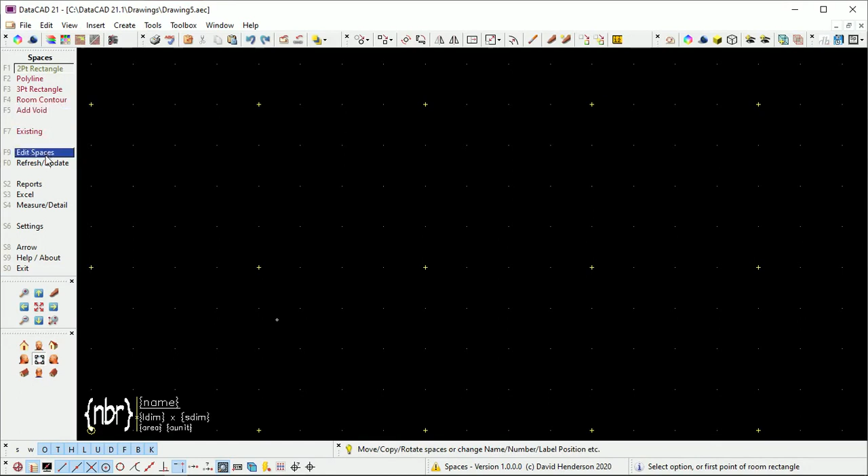Like Space Planner, the Spaces macro allows you to define spaces, to create and maintain labels for those spaces, and to report on spaces. We'll start this video by looking at some of the settings.

The label settings allow you to specify labels as up to 5 lines of text. The data in each line is represented by tags, which are the text in curly braces here. You can type the tags in manually, or you can use the buttons on the left side to insert them.

Alternatively, the label can be defined using a symbol. I've already created a symbol which is shown at the bottom left of the screen here. So I can click the from symbol radio button and choose that symbol which I'm going to use.

The report layout is specified using the same tags to define the data in each type of line. Up to 10 report columns can be specified, and different text format attributes can be assigned to each type of line. I'm just going to make some fairly arbitrary changes to the text formats.

The report can be created on the currently active layer, or you can specify a layer. Additionally, you can choose to draw grid lines between the rows and columns.

The Units tab on the Settings form allows you to specify the units for each type of measurement. Different units can be specified for labels, reports, and exported values. And it is also possible to specify different units for different types of areas.

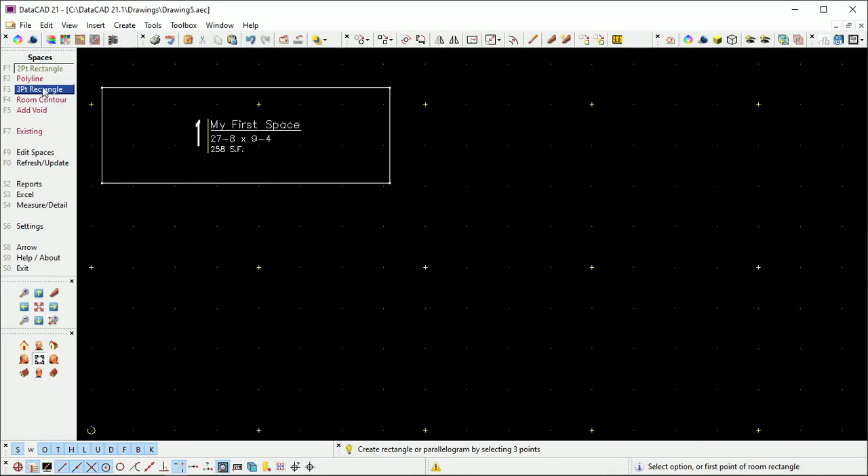The simplest way to define a space is simply to drag out a rectangle. Once I've dragged it out, a form is displayed with several fields, but I'm just going to key the space name and press enter. For non-rectangular spaces, I can use the polyline input option.

When the space properties form is displayed this time, I'm not only going to key in the space name, I'm also going to select to use solid fill and select a fill color.

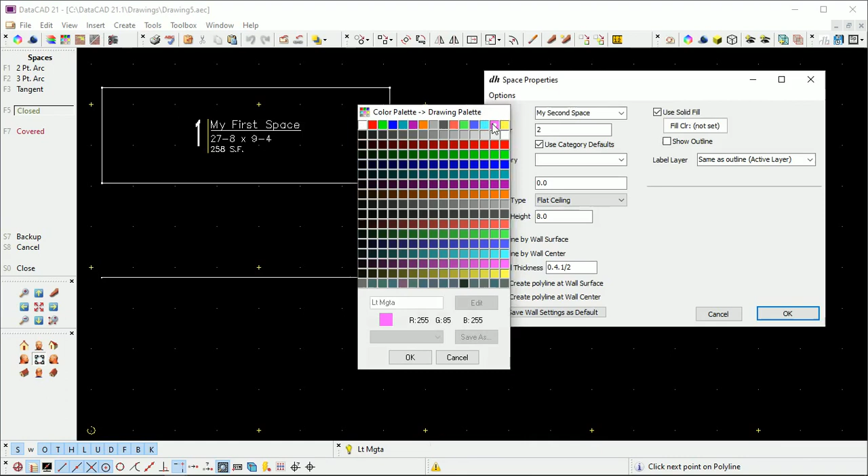The 3-point rectangle input method is used to create a rectangle or parallelogram space. Once the second point is selected, the snap grid angle is set to the angle of the first line, making it easy to create rectangles that are not parallel to the axis.

I'm selecting a different fill color for this space, and I'm also specifying to show an outline around the fill. In addition, I'm keying in a category name.

If I go to the Categories tab of the Settings form, I can see that the category name I just entered has been created with a default solid fill color of light blue.

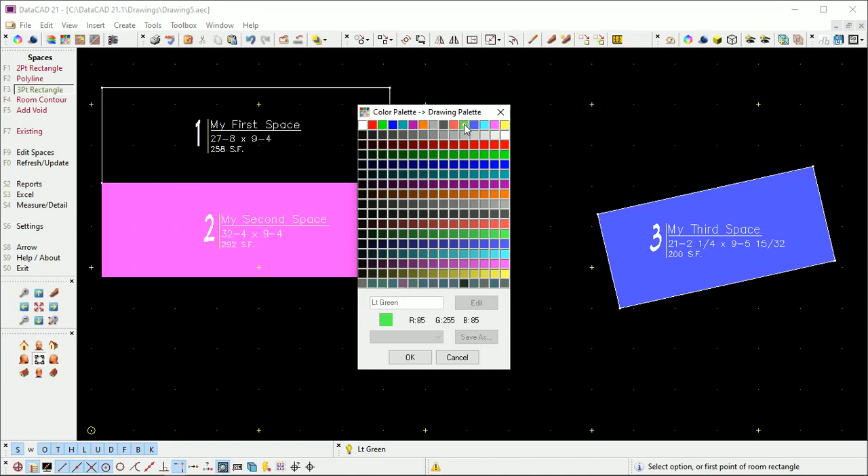Whilst I'm on this form, I'll create a new category. I'm not only going to specify a different fill color for this category, but I'm also going to specify that it not use the Z height that is in effect when spaces are created, but instead uses a default ceiling height of 17 feet.

I'm going to create another rectangle space, and this time on the Space Properties form, I'm going to key a new number to start a new sequence, and I'm also going to select the category that we just created. Once the category is selected, the fill color and ceiling height are automatically set to their category values.

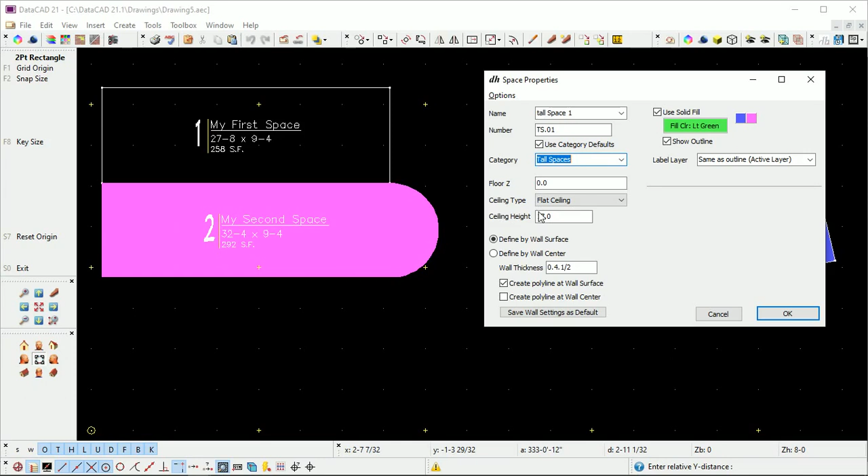This can be avoided by changing some settings on the Wall Options tab of the Settings form to tell the macro that we're defining spaces by the wall center.

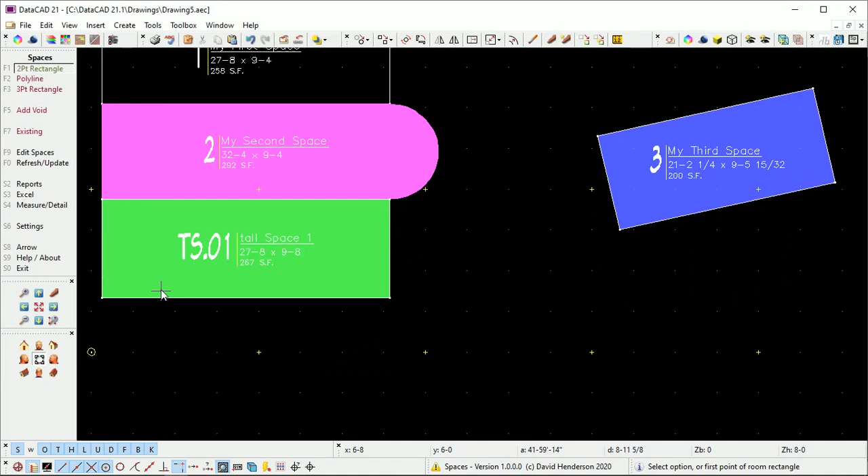If I now create another space the same size as tall space 1, you can see that the dimensions and area now reflect the reduction caused by the wall thickness.

I'll now look at the reporting functionality in the macro. To start with, let's take a look at the summary report. I won't look at the layer tabs because I've created all my spaces on the same layer, but I can show you how it reports by category, as you can see here.

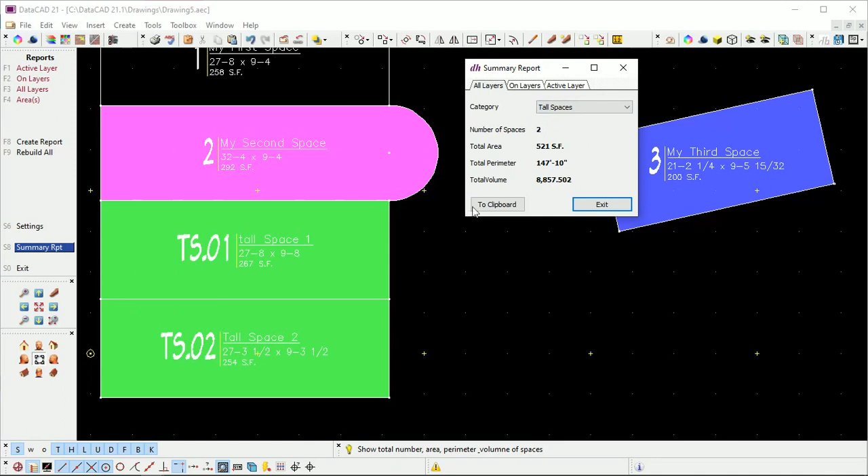I'll copy the tall spaces report to clipboard before I exit, and then temporarily paste that into the drawing so that you can see the report.

I'm selecting active layer to create a detailed report. Once I click that, the appropriate spaces are highlighted. When I click create report, the report options form displays. Report name is mandatory, but I can leave it as the default. Report title is optional, and I'm typing a value in there, and I'm selecting by category for the subtotaling before I press the create report button.

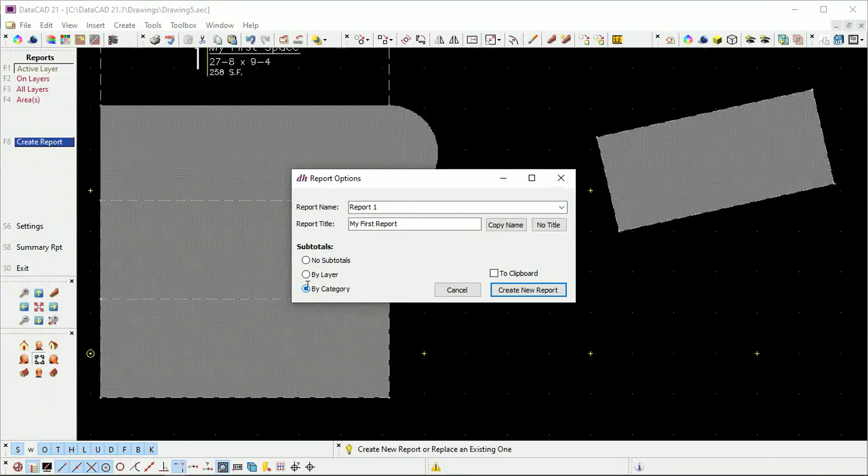The report is placed on the screen using the cursor, and once I click, the report is created in that location. I now decide that I'd like to create a new field that can be included on both reports and labels.

So I go to the User Defined Fields tab of the settings and select to create a new field. I enter a suitable description and a unique tag of up to 6 characters. I'm choosing an integer format for this field, and I'm giving it a default value of 1.

I can now go to the Spaces Edit menu, enable Details from that menu, and select my second space. The details show the default occupancy value of 1, but I can change that to another value such as 5.

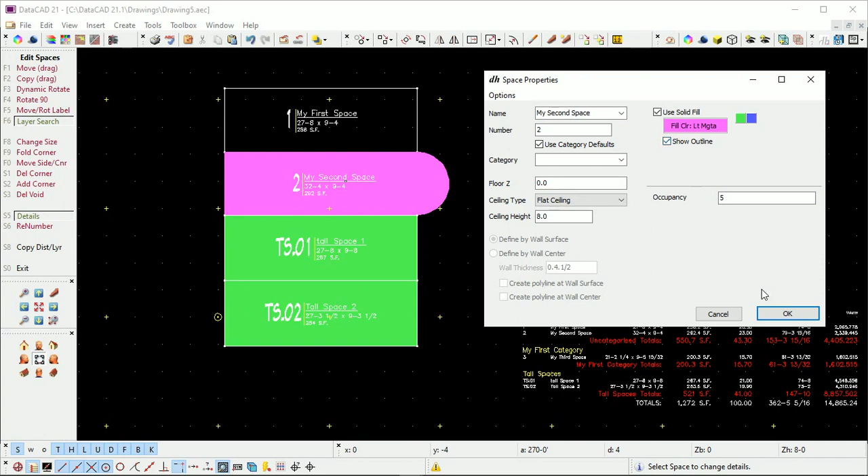Whilst editing the properties, I also check the Show Outline box, and on acceptance of the input, I can see that my second space now has an outline around the fill.

I now wish to add a column to the reports for the occupancy field that we've created. So, in the Reports page 1 settings, I can insert a column by going to the column number, clicking, and in the column menu, I select Insert.

I type an appropriate column heading and use a new tag, which now appears at the bottom of the tag list on the left-hand side, to insert data into the remaining rows.

Whilst I have the settings form open, I decide that I no longer wish to see fractional inches in the dimensions or perimeter columns of the report.

To achieve this, I go to the Units tab and change the dimensions setting for reports to feet and inches rounded.

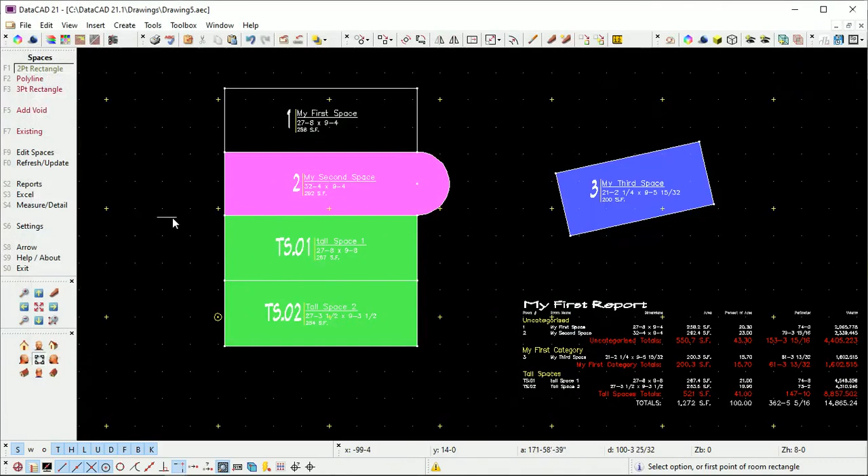If I select Create Report with no selection active, it will enable me to replace an existing report. On selecting that, the report is created with the new format.

As you see, we now have an occupancy column, and we no longer have fractional inches in the dimensions or perimeter columns.

I'm going to create one more space in this video, but before I do that, I'm going to change a setting so that the report will be updated automatically.

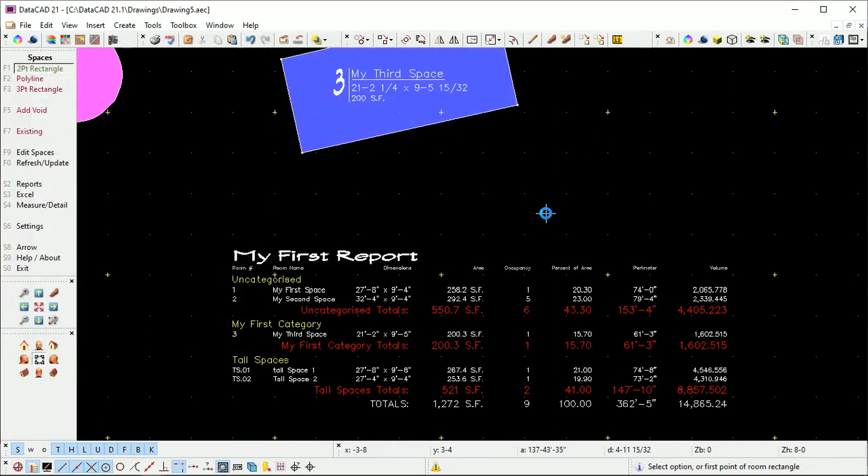After clicking the first point, I select to key size so that I can enter dimensions from the keyboard. This also allows me to select an angle for the space, and I'm also selecting to anchor the space by the bottom left corner. The square displayed at the first insertion point indicates the angle and anchor point.

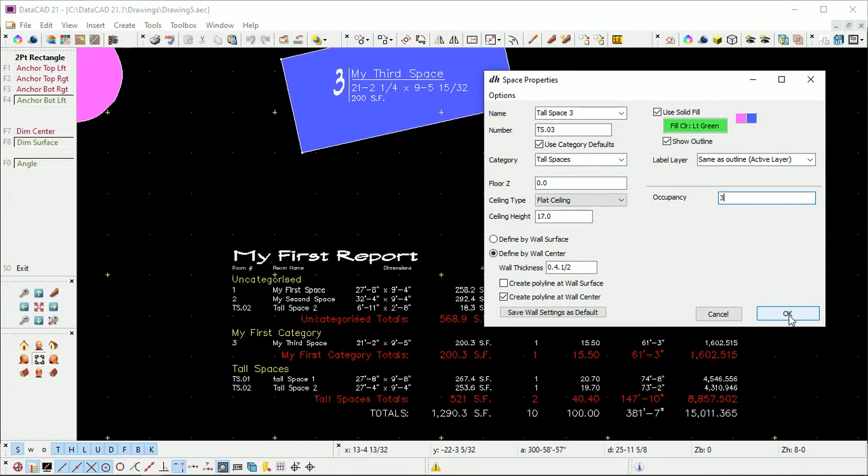I enter appropriate details for the space, and once I press OK, you'll see that not only is the space created, but the report is updated to include a new line for that space.

The last thing that I want to show in this video is the Measure Detail option. Select this option and then click on a space to display detailed information about it, noting that the units used will be those specified for the clipboard.

You can copy and paste from the dialog if you wish to use the measurements elsewhere. Once you dismiss the dialog, the dimensions of each side of the shape will be shown.

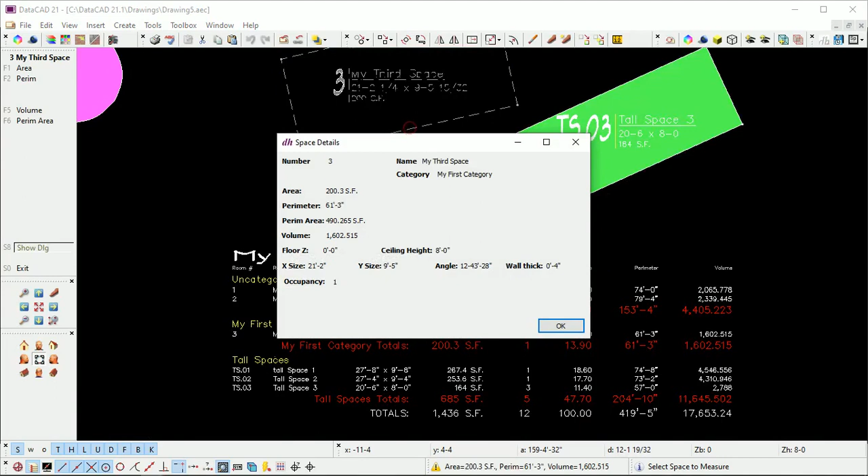Note that these are the dimensions of the polyline, and if it's been defined by wall centre, they won't be identical to the dimensions reported for the space. Simply click on other spaces to display their details.

If you disable the Show Dialog option, then the dialog won't be displayed, but you can still copy data to the clipboard using the function keys.